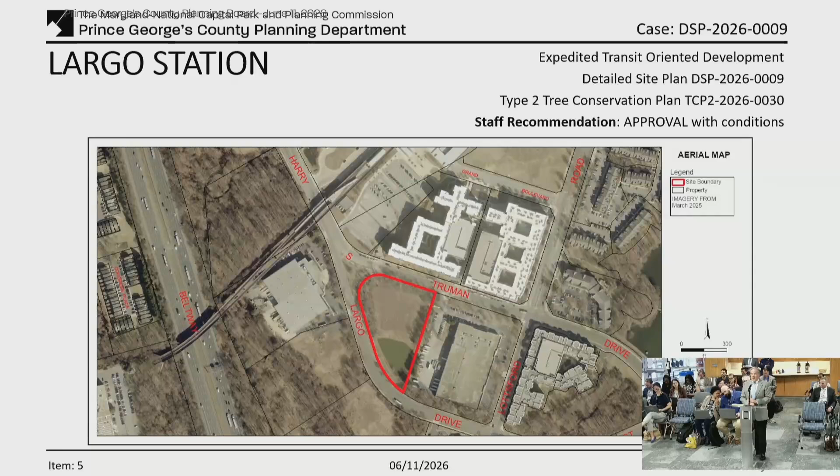Any questions for the Planning Board? I see none.

You want to take that call? Music on.

Alright, I see the location. The hearing is now closed.

I move. Any question? Board members, any deliberation, or what's your pleasure?

I move that we adopt the findings of staff and approve DSP 2026-0009 and TCP2-2026-0030, subject to the conditions recommended in the technical staff report as amended by the applicant.

Second. We have a motion by Commissioner Jenkins and a second by Commissioner Gerardo.

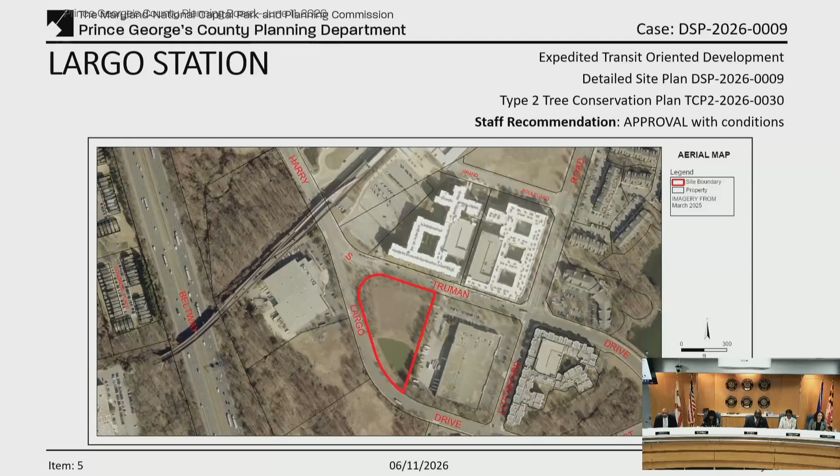I'll now call the vote. Commissioner Gerardo, I vote aye. Commissioner Jenkins, aye. Commissioner Matthews, I vote aye. And I vote aye as well.

Happy to hear that we will see shovel on ground come August 2026. Correct, not 2029, 2026. Thank you very much.

Next item on the agenda is item 6, specific design plan, SDP-2025-0015, Saddle Ridge. We'll now hear from staff.

Good morning, Vice Chair and members of the planning board. For the record, my name is Emery Huang with the Urban Design Section.

Item number 6 is specific design plan SDP-2025-0015 for Saddle Ridge. This specific design plan is for the development of 450 single-family detached dwellings and 253 single attached dwellings with recreational amenities.

As a matter of housekeeping, prior to the June 9th noon deadline, staff received one exhibit from the applicants titled Applicant's Exhibit 1. This exhibit outlined the revised findings and conditions proposed by the applicants. Staff have reviewed and revised the conditions and agreed with the revisions. Next slide, please.

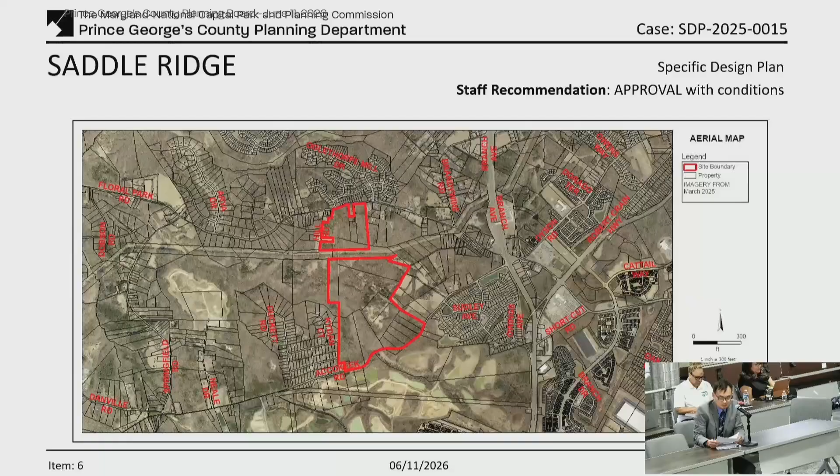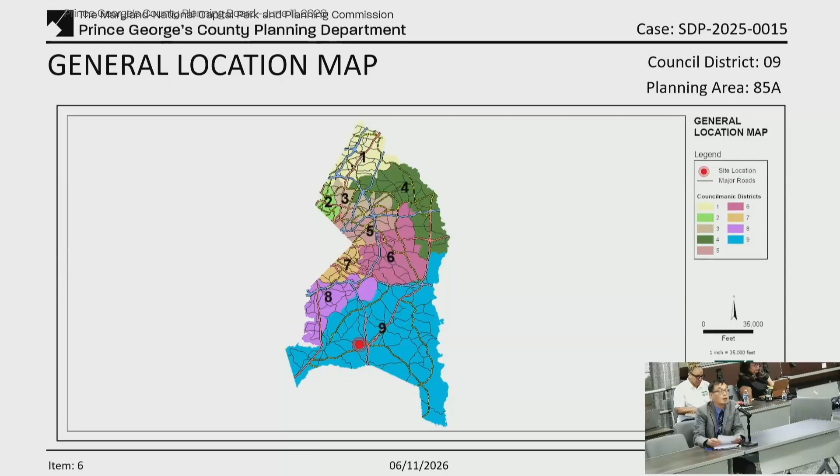This subject property is located in Planning Area 85A and Council District 9. The site is located to the south of Floral Park Road and north of Accokeek Road, approximately 1 mile west of the intersection of Accokeek Road and Brandywine Road.

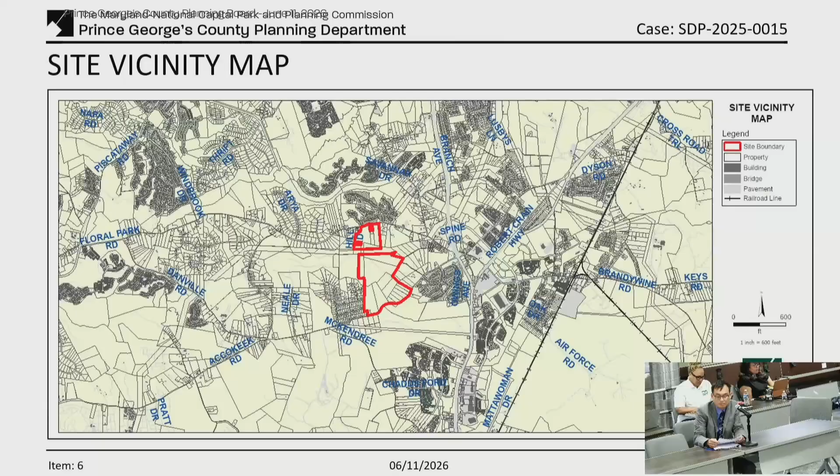The subject site, outlined in red, is located within the Legacy Comprehensive Design Zone, as shown in the image to the right. However, this application is being reviewed under the prior zoning ordinance, and its prior zone is residential suburban development, as shown in the image to the left.

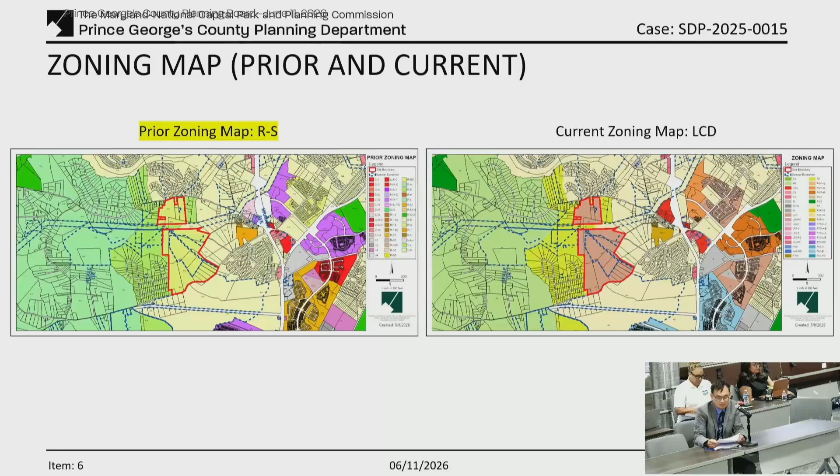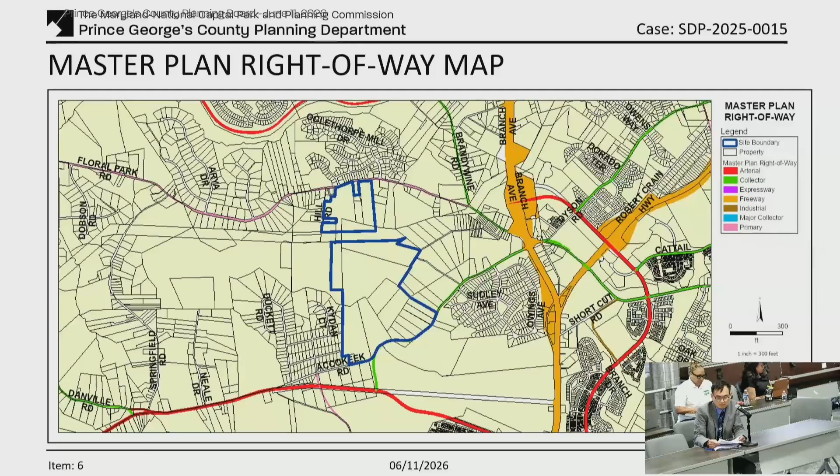This map shows the adjacent master plan's right-of-way. Floral Park Road, adjacent to the subject property to the north, is classified as a primary road, while Accokeek Road, bordering the property to the south, is classified as a collector road.

The subject property is currently wooded and is bisected by an approximately 350-foot wide corridor owned by the Potomac Electric Power Company, which divides the site into two development parts.

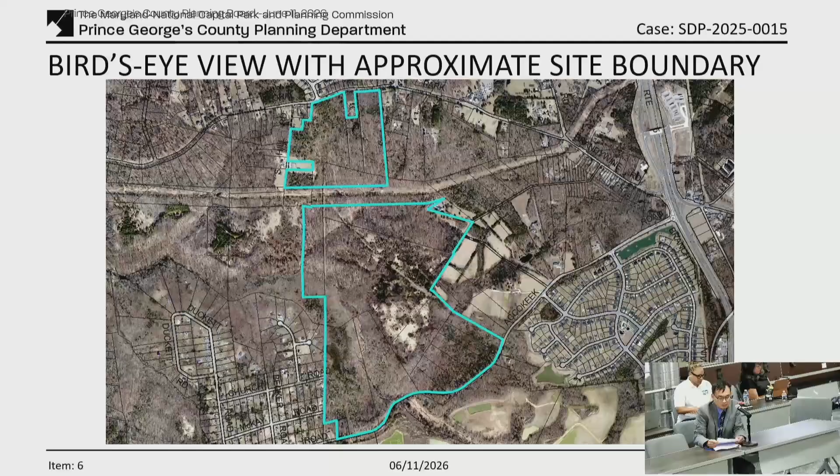To the north, the property is bounded by Floral Park Road with single-family detached homes located beyond. To the south, it is bounded by Accokeek Road with the Millville Quarry situated beyond. To the east and west, the site is surrounded by a mix of vacant land and single-family detached homes.

This specific design plan shows that the subject development consists of two development parts. The northern development part including 163 townhouse dwelling units, while the southern development part including the remaining single-family attached and detached dwelling units.

The subject development includes various types of recreational facilities such as a clubhouse with a pool, a dog park, a community garden, tennis courts, playgrounds, and seating areas throughout the site. Next slide, please.

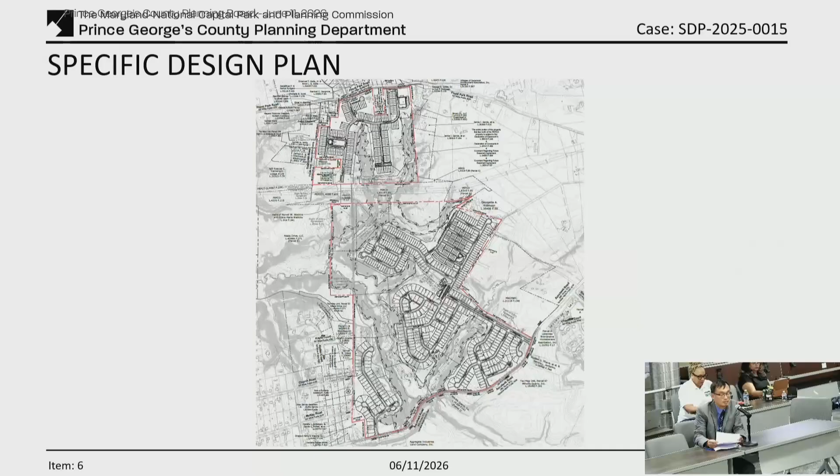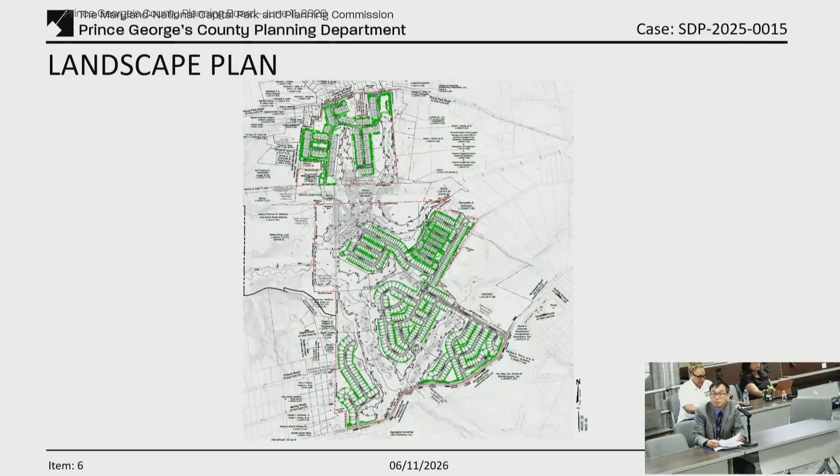The development is subject to the 2010 Landscape Manual requirements. The submitted landscape plan demonstrates compliance with all applicable sections, which is discussed on page 25 of the technical staff report. Next slide, please.

These slides demonstrate the tree conservation plan, which is discussed on pages 25 through 29 of the technical staff report. Specifically, Type 2 tree conservation is in conformance with the Type 1 tree conservation plan associated with preliminary plan of subdivision 4-24013, which was approved by the planning board in 2025.

Specimen trees were evaluated for removal with preliminary plan of subdivision 4-24013 and the specific design plan SDP-2304, for a total of 76 specimen trees. With the subject application, the applicants propose saving 5 specimen trees that were previously approved to remove, and requested a variance to remove 1 specimen tree on site.

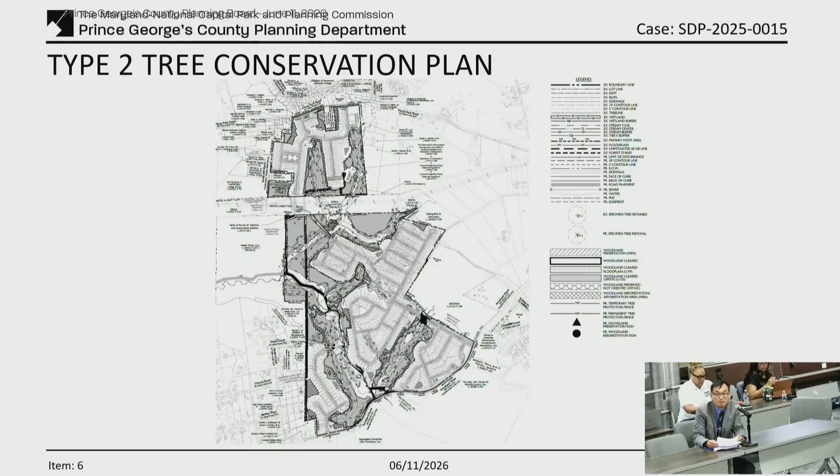As such, the total number of specimen trees to be removed for the subject property will be 72. An analysis of staff findings on the requested variance can be found on pages 25 through 29 of the technical staff report. Next slide, please.

These slides illustrate 2 access points from Floral Park Road serving the northern development part, and 3 access points from Accokeek Road serving the larger southern part.

Internal circulation is supported by a network of both public and private streets designed to accommodate vehicles efficiently. Vehicular and pedestrian circulation are clearly defined and separated to provide safe, convenient access throughout the site. In addition, a master planned trail will link the northern and southern parts, offering continuous bicycle and pedestrian connectivity to amenities across the subject development.

It's noted that the traffic impact for the proposed development was evaluated with a certificate of adequacy ADQ-2024-019, which has been previously approved.

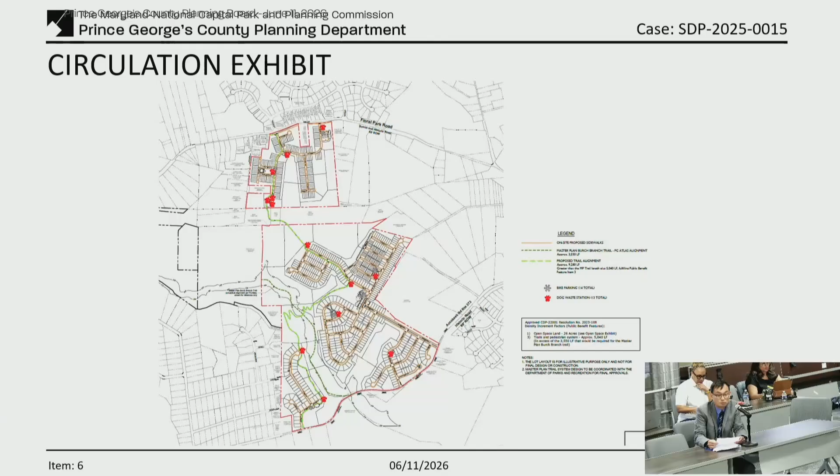Next slide, please. Slides 12 and 13 represent the elevation of the proposed clubhouse, located in the middle of the southern portion of the development. This design includes a low gable roof with multiple projections, covered with asphalt shingles, horizontal siding, fiber cement panels, stone columns, and larger windows in a contemporary design trend.

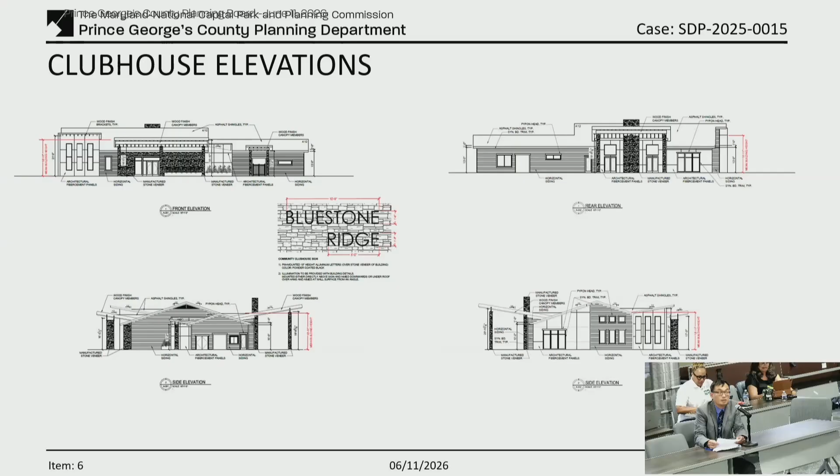Next slide, please. And next slide.

To sum up this presentation, Urban Design Staff recommends that the Planning Board adopt the findings of the report, approve Specific Design Plan SDP-2025-0015, Type 2 Tree Conservation Plan TCP2-2026-0032, and the variance to Section 25-122(b)(1)(G) for Saddle Ridge, subject to the recommended conditions of approval within the technical staff report, with the revision proposed by the applicant's Exhibit 1. This concludes their presentation. Thank you.

Thank you very much for that report. Any questions for staff? I have a question.

With Saddle Ridge, are there any anticipated road widenings? You're going to widen the roads? Yes, so Resource Commissioner Matthews, during the PPS there's a roadway dedication along Floral Park Road, and that will already be shown on the plans. Okay, thank you.

Any other questions for staff? I see none, and we'll hear from the applicants.

Thank you. Mr. Vice Chairman, members of the Planning Board, for the record, Matthew Tedesco of the law firm McNamee Hosea, here on behalf of the applicant, D.R. Horton, Incorporated. With me this afternoon are a number of representatives of the development team as well as the applicant team, and I'll introduce them for the board's benefit and ask them to acknowledge the board. From D.R. Horton, we have Bobby Varner and Jeff Otenisek.

From Rogers Consulting, we have Charlie Howe, Christine Gillette, and Rob Swam. Not with us, but part of the team, Bridget Stokes and Steve Allison. From my office, Dominique Lockhart, attending virtually. And from Lenhart Traffic Consulting, we have Mike Lenhart, who's in the room. We also have Monroe Harrison from GS Proctor & Associates, rounding out this development team. I want to thank them, and I want to thank your staff for their review of this application.

This property has a very long history of surface mining operations going back more than 50 years. The project's initiation goes back more than 5 years, starting in 2021, and even before then in 2013 with the Subregion 5 Master Plan. The vision and goal for this project was to create the best possible land plan while preserving and enhancing the property's unique environmental characteristics and features, including the Burch Branch and its associated tributaries.

This application represents the final implementation step in a 5-year planning and approval process. What's important to note is that this project has not grown larger or more intensive as it moved through the entitlement process—quite the opposite. Going back through the approvals, I'll go through them briefly as staff highlights them in your staff report.

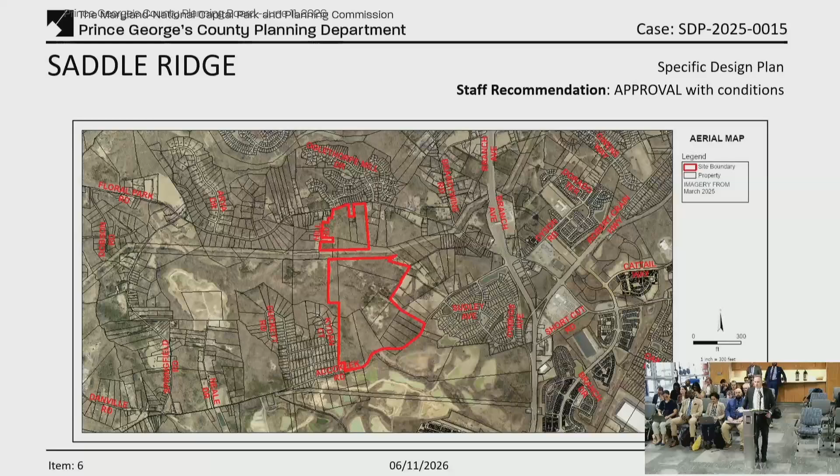For all those reasons, we would respectfully request your approval of this application as recommended by staff, as further modified by Applicant's Exhibit 1. Myself and the full team are here to answer any questions. We thank you for the board's continued support of this project and hopeful approval today.

Thank you. All right, any questions for the applicant's attorney? I have one question. In reference to the stormwater, how many stormwater management facilities are proposed?

I'd have to have Mr. Howe come up here and answer that. We have an approved stormwater concept approval. All that was vetted and approved with a specific design plan for infrastructure, but I don't have the actual number at my fingertips. Forgive me, Ms. Matthews.

To answer the stormwater management question, our concept has 25 micro-bioretention facilities and 12 submerged gravel wetlands, along with water quality and flood control. Okay, thank you.

Any other questions for the applicant's attorney? I see none. We'll now take testimonies from those who have signed up to speak on this item. We have Bobby Warner.

Bobby Varner, yeah. Mr. Vice Chairman, we have a number of representatives of the applicant team who have signed up, but none of whom need to speak. Okay, thank you.

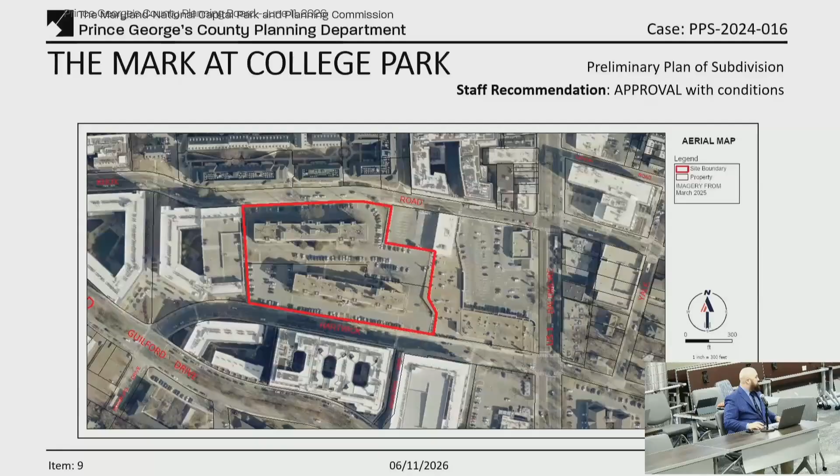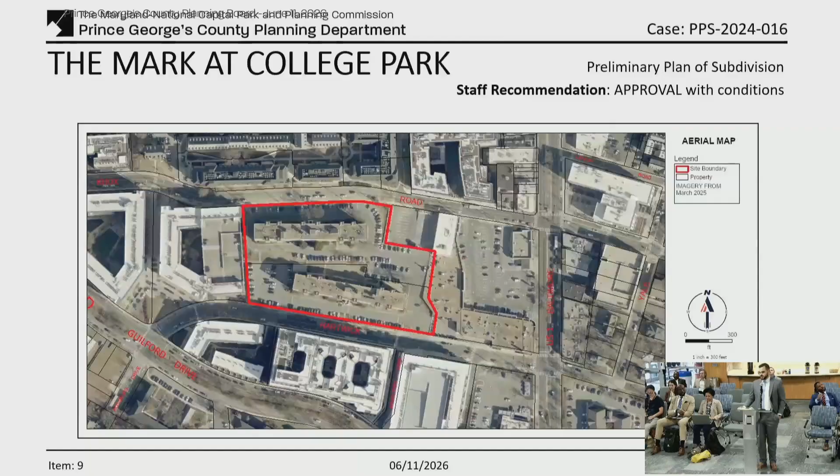All right, thank you. Any question for the applicant's attorney? I have a quick question. In reference to the traffic, how will this project impact traffic along US 1 and Hartwick Road during the peak hours of university traffic? For that, I'll ask Michael Lenhart to provide.

Hi, good afternoon. For the record, Michael Lenhart of Lenhart Traffic Consulting. We did conduct a traffic impact study that was scoped with Park and Planning, Transportation staff, State Highway, DPIE, and DPW&T. The scope for College Park sector adequacy is based upon looking at signalized intersections from Campus Drive down to Guilford Drive. All of those signalized intersections between that section we looked at in the study, as well as site access points along Hartwick and up in the community, and they all were found to pass. Okay, thank you.

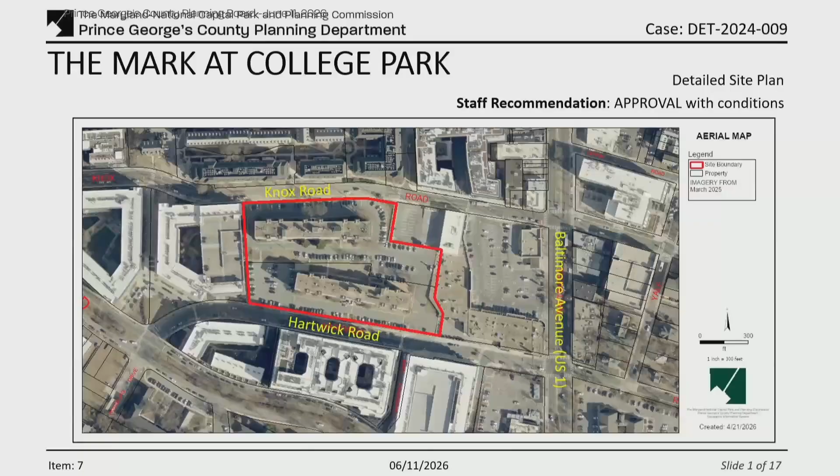I will now call the roll. Commissioner Jenkins? Aye. Commissioner Matthews? Aye. And I vote aye as well. The ayes have it.

Sorry, finish the vote. I apologize for the distraction of the note. No, I think we finished. I voted aye, so the ayes have it. This will conclude all items for today's agenda.

At this time, I would like to return to item 3B for an additional closed session to obtain legal advice related to the budget, under section 3-305B7 of the General Provisions Article of the Maryland Code.

Can I get a motion? I move that we go to closed session. Second. All right, we will go into closed session and we will not be returning. Call the vote on that. So I have a motion by Commissioner Jenkins and a second by Commissioner Matthews.

I call the roll. Commissioner Jenkins? Aye. Commissioner Matthews? Aye. And I vote aye. This will conclude the agenda. Actually, it doesn't conclude the agenda, but we'll be going into a second closed session, and we will not be returning. We'll be closing up. I have to check the rules on that. We don't have to return to close the meeting. Apologize. All right, so we voted to go into a second closed session.